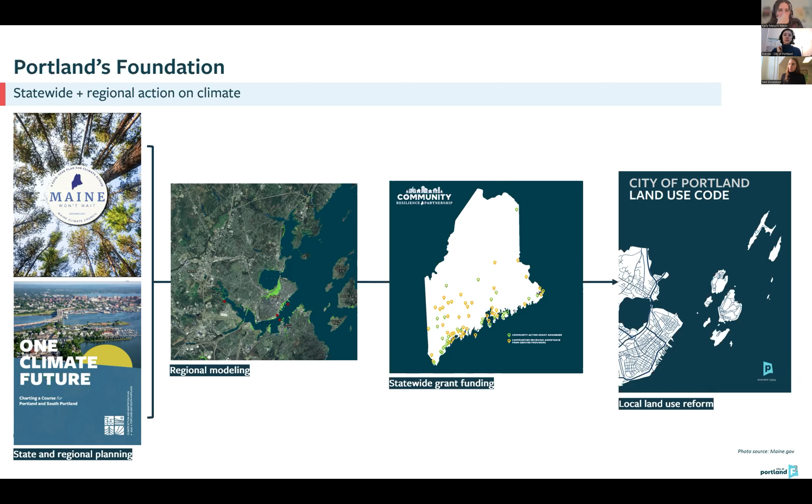So coming out of One Climate Future at the City of Portland, we collaborated with the City of South Portland again and the Army Corps of Engineers to develop, first and foremost, a regional hydrodynamic model that could more accurately help us understand the future risks associated with sea level rise and storm related flooding. And then we applied for a statewide community action grant to actually fund the climate resilience zoning work. We got that funding and embedded this work within our local land use reform effort.

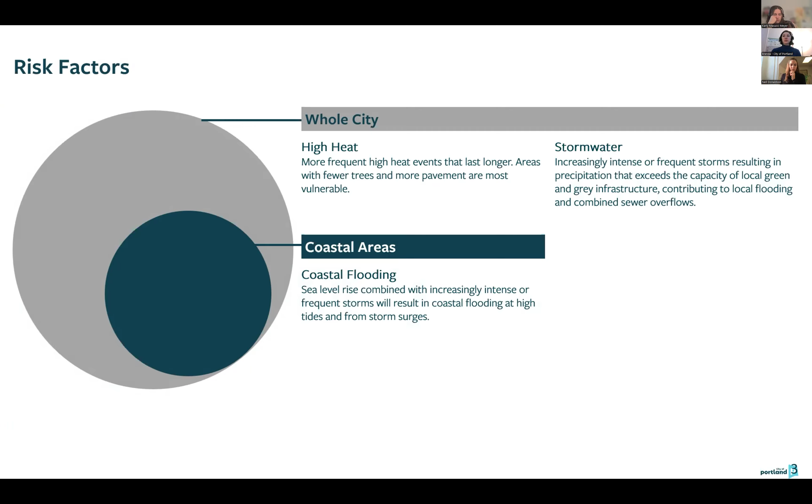So there's sort of three things we were trying to tackle with our climate resilience zoning effort. At the whole city level, we were trying to tackle risks associated with high heat. We know we have more intense heat, more high heat days, and stormwater, again, more intense precipitation, more frequent storms. And then in a more sort of confined geographic area, we know, everybody knows, we are facing risks associated with flooding, in association with sea level rise and storm surge. I'm going to talk about all three of these risk factors in the work we did in our zoning. I'm going to spend the most time on the coastal flooding response, just because that's one that people are broadly interested in, and I think it dovetails with work that South Portland is doing.

The basic principle of our response to the coastal flooding risk is not new. It's about elevating uses to get them out of harm's way. This is a pretty basic concept. There's lots of communities around the country that are doing work and responding to flood risk in this way.

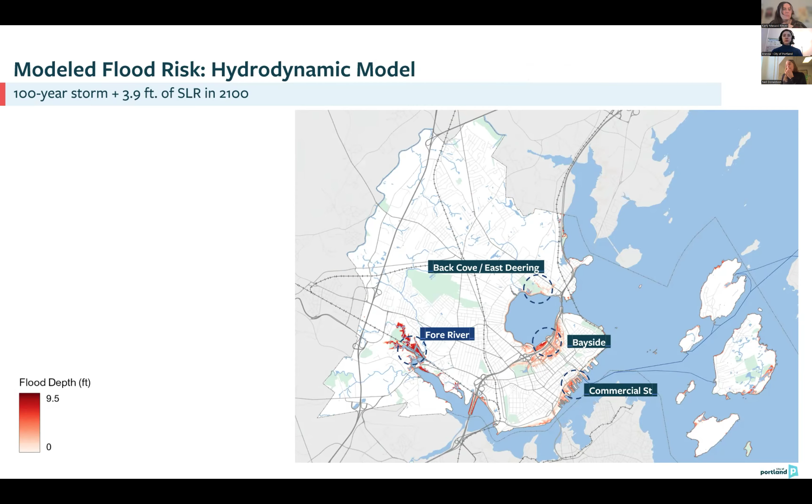This is a map that shows the work we did with the Army Corps of Engineers to really understand sea level rise and associated flooding. So this map shows the results of the hydrodynamic model, which projected a 100-year storm plus 3.9 feet of sea level rise in the year 2100. I'll show you a comparison. There's a couple of areas where the FEMA floodplain versus the hydrodynamic model, you see a really broad difference, particularly in Bayside and downtown and the waterfront.

So though those FEMA regs have done a lot of things well, the hydrodynamic model shows a different set of risks in a different area and at a different level. And so we built our coastal flood resilience overlay zone off of this hydrodynamic model.

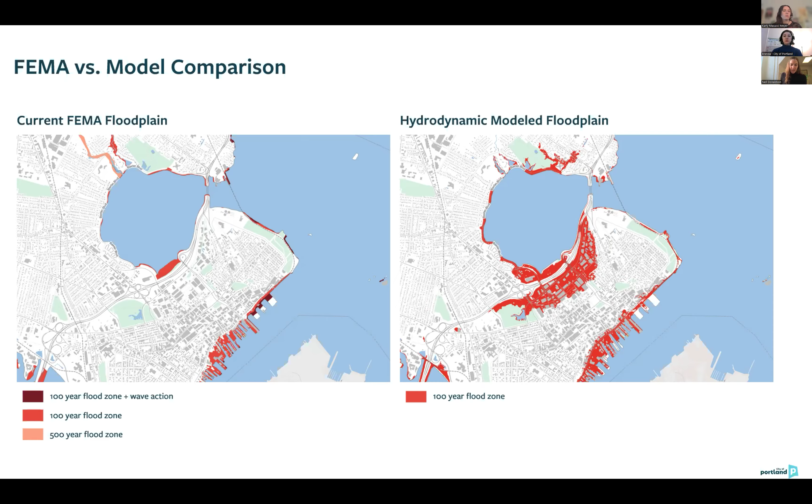And just quickly, brief stop. We're lucky and unlucky in lots of ways in doing this work, but recent experience really shows that the hydrodynamic model is accurate, right? We have recent experience in the city of Portland and South Portland too, of flooding that really maps with what the hydrodynamic model was showing.

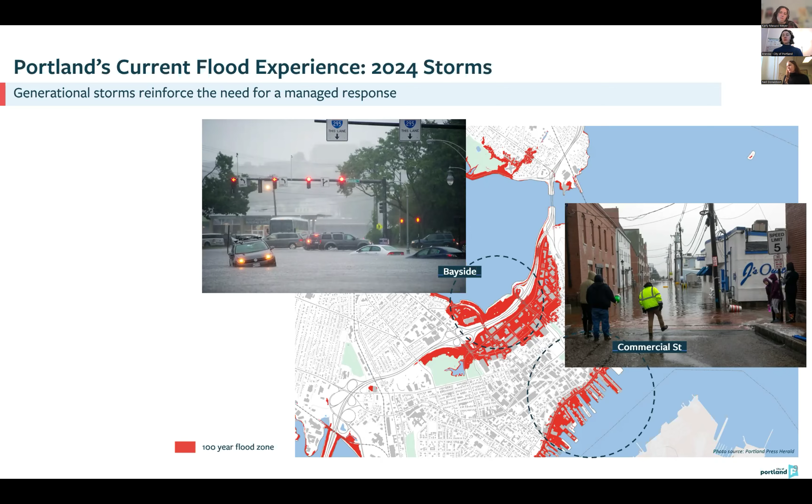And I think this was something that worked in our favor in developing this zoning, right? People understand there's a risk here and that we need a coordinated response. And so in getting this zoning underway, we didn't have to work terribly hard to help people understand why this was necessary.

Just a quick stop too on these two areas that are showing the most vulnerability in our hydrodynamic model. Bayside and the waterfront are different areas with different opportunities and different futures and different barriers and constraints. And so when we were thinking about developing our response to the sea level rise risk, we were really trying to craft a regulatory tool that could be flexible enough to handle these different areas, right?

Bayside, you've got fill from that mid-19th century fire. You have an industrial legacy of large blocks, urban renewal legacy of large blocks close to downtown. The base zoning there has been very flexible and promoting lots of development. It's close to downtown. It's an area with lots of opportunity.

The waterfront presents a different environment, right? We have waterfront uses that are prepared to get wet in lots of ways. We have on the upland side a historic context that isn't seeing much development or change in terms of building. And there we recognize we need a more adaptive strategy, right?

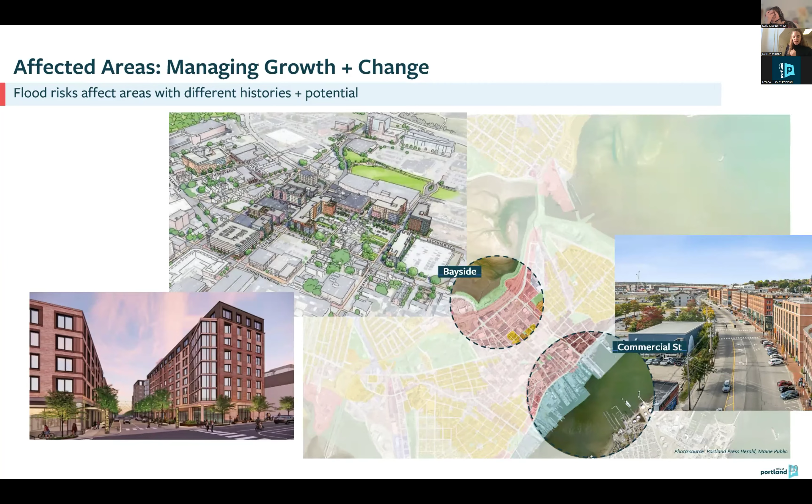And so we were trying to write the code for various types of places and provide flexibility, with the basic premise that we're not ready to retreat from these areas. We need to manage risk in the place we're at right now, and still let things happen in a smart way. So the approach is what we're calling our coastal flood resilience overlay zone.

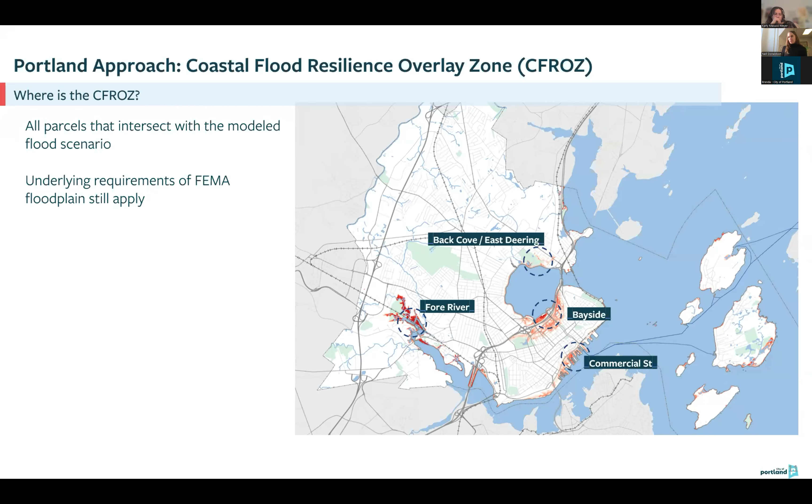It basically follows the areas that intersect with that hydrodynamic model. So this is that model again. Any area that shows flooding in that hydrodynamic model under that sea level rise scenario, 3.9 feet, is in the coastal flood resilience overlay zone. It's important to note the requirements of FEMA still apply. And we developed this zone, again, with this idea of flexibility, using a tiered approach.

So there's a couple of concepts that are central to the way we wrote the zoning. First and foremost is that we want to be stringent where it matters the most, where we're most concerned about vulnerable uses and vulnerable buildings. We want to plan for future adaptation in other contexts, and then certain things are okay to get wet, and we can let things get wet as long as we are smart about it.

And so we wrote the zoning with tiered use paradigms. So certain uses are exempt: marine uses, parking uses, storage uses, these uses that can get wet, can withstand periodic episodic flooding. We set a second bar of uses that we called non-critical uses.

These are uses where people are not generally most vulnerable when they're in these places, right? People can choose when they're at a restaurant or they're going shopping. So these are uses that people can sort of plan whether to be in at times when there might be flooding. And then critical uses, places where people are sleeping, basic functions of government. These are places that are super vulnerable in the context of sea level rise and storm surge.

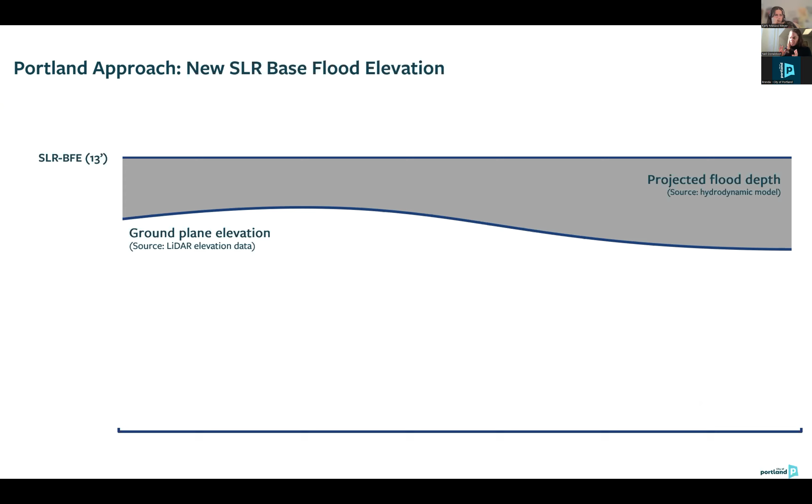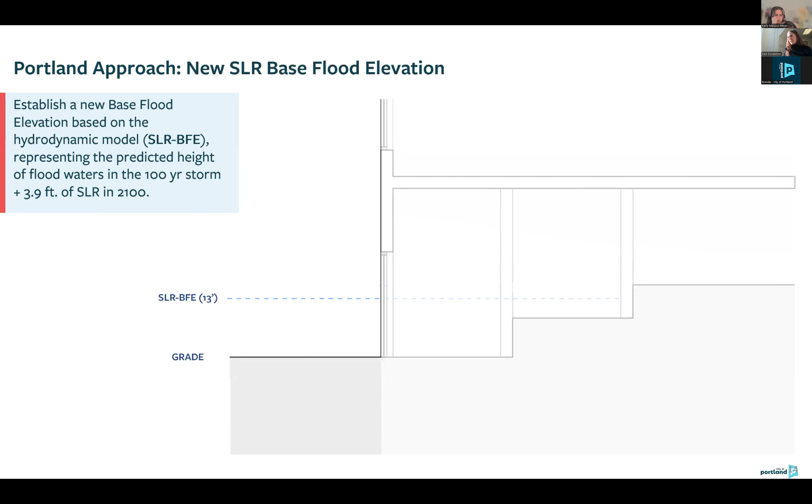So the zoning is really pretty simple. The idea is there's a sea level rise base flood elevation based on that hydrodynamic model. We set one sea level rise base flood elevation throughout the entire zone. Lots of communities take different approaches to this, but we wanted these regulations to be simple and understandable and easy for folks to deal with at the site level. So that sea level rise base flood elevation is 13 feet across the entire Coastal Flood Resilience Overlay Zone in the city of Portland. And basically the way the zoning works, exempt uses are allowed anywhere in the zone relative to that sea level rise base flood elevation.

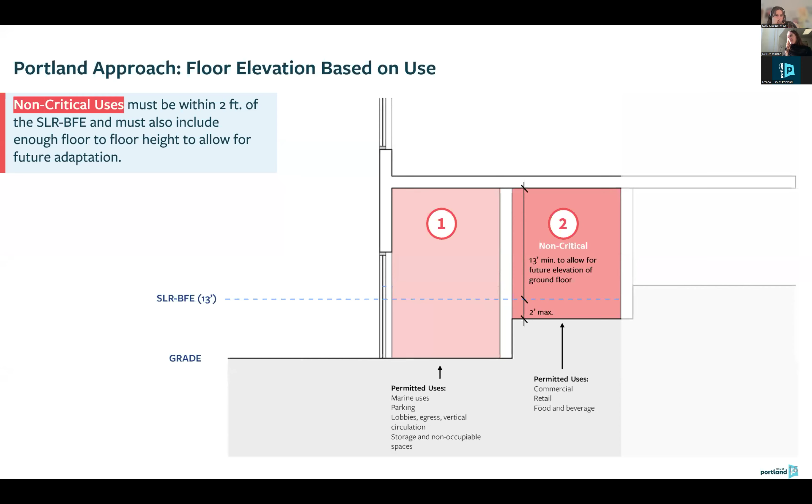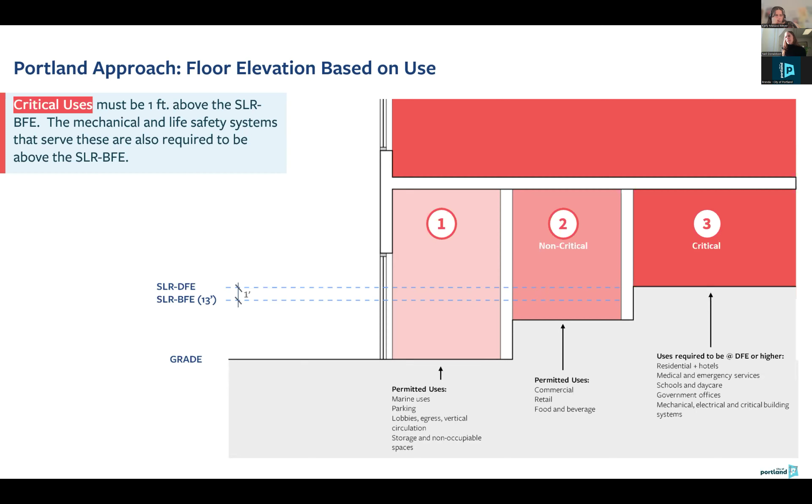Non-critical uses, again, restaurants, retail, need to be within 2 feet of that sea level rise base flood elevation. So it can actually be 2 feet below that sea level rise base flood elevation. And that's, again, because these are uses that people can choose to be within or without. There's other flood proofing that can help with these types of spaces. And then critical uses are required to be 1 foot above that 13-foot sea level rise base flood elevation. Again, places where people are sleeping, schools, these critical functions and most vulnerable places need to be elevated. That's it. That's the basic approach.

And it is worth noting we did a couple of other things in our zoning to accommodate the fact that regulations like these start to bump up against other goals that we have at the city, right? So we want first floors, particularly in mixed use areas of the city like parts of Bayside or downtown or the waterfront, to be active. We want people to be able to see in the first floor windows. We want people to be able to access the first floors of these buildings in a wheelchair. And so we did a couple things, particularly in our dimensional standards, to compensate for what we're requiring in terms of ground floor elevation.

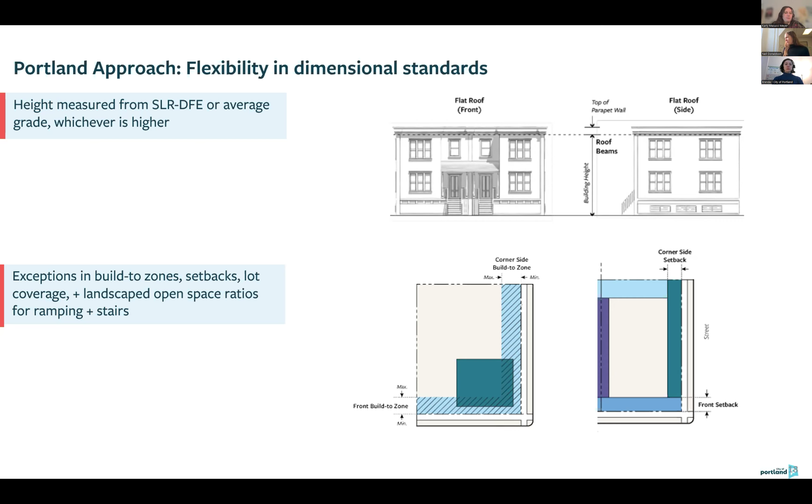One, we allowed additional height. So in the Coastal Flood Resilience Overlay Zone, you're allowed to measure height from the design flood elevation. So that gives people a little bit more headroom, so to speak, to go up, to compensate for the fact that we're requiring them to build that first floor up. And then we provided some exceptions around setbacks and build-to zones so that people could fit things like ramps and stairs, so they could deal with that interface with the street in ways that are creative, and again allow us to meet other goals that we have in terms of the public realm and ADA accessibility, et cetera.

Just very quickly, this zoning is not very old, it's a year old. So we haven't seen a lot of development within the Coastal Flood Resilience Overlay Zone yet. But we do have a couple of projects in the pipeline. One is on this site in Bayside. I'm showing on this slide the design flood elevation for critical uses. So here's a site, and we're saying through these zoning regulations, if you're going to put housing here, you need that first floor to be 5.5 feet above grade, which is high, right? That's my height. That's where the floor is on a housing development on this site.

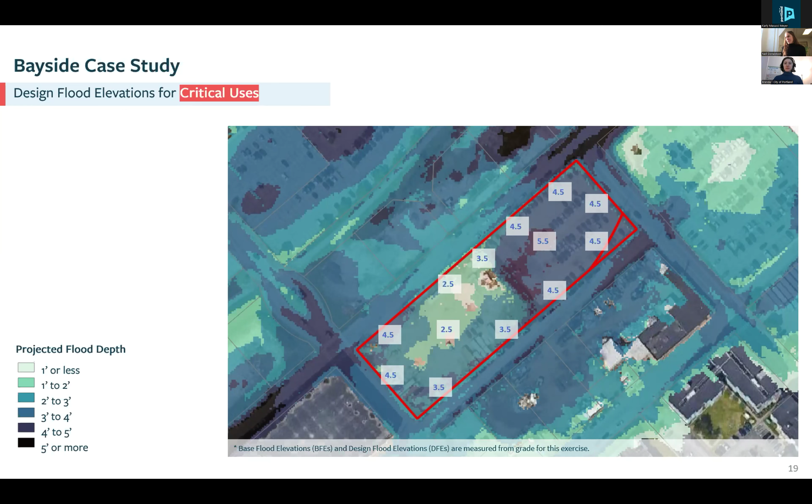We spent a while developing graphics to help the general public understand how people might manage this requirement inside and outside buildings. Again, this is where these requirements are interfacing with other goals that we have at the city around the public realm.

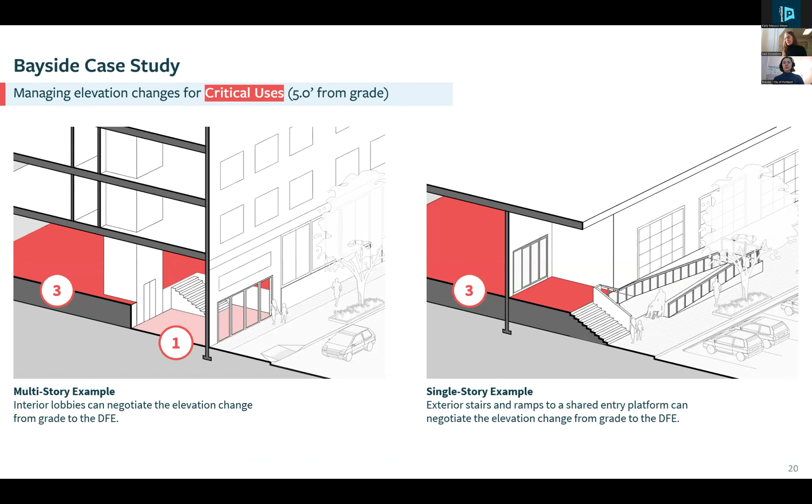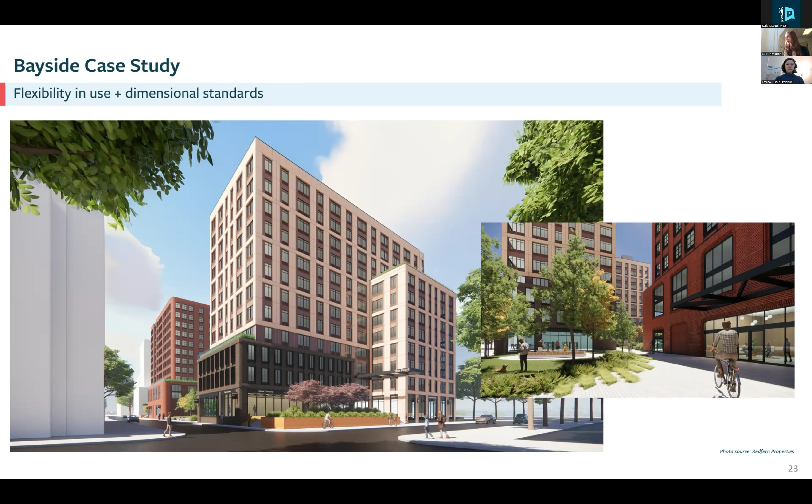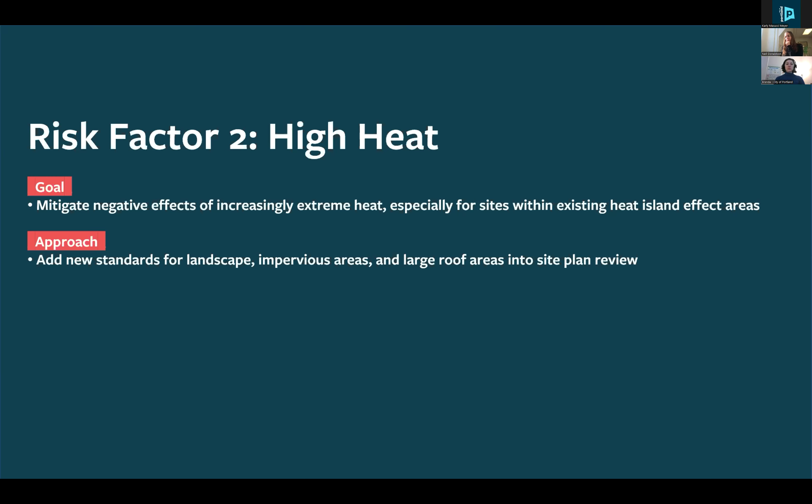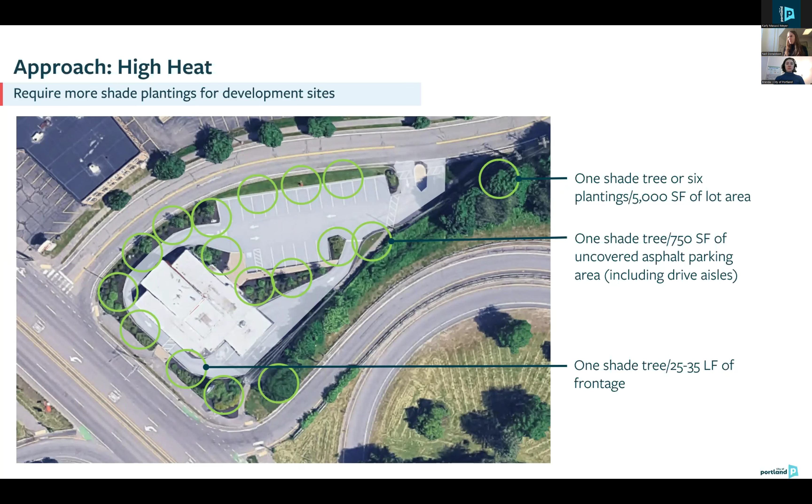So we essentially enhanced our canopy requirements for all development sites: parking lot and paved area canopy requirements across all types of sites, even without parking areas. And our street tree standards we modified as well to more accurately get at the heat island issue in terms of shade trees. We also established some cool roof and cool paving requirements. Certain projects in the city are now required to meet solar reflectance index standards for roofs, and non-vehicular paved areas on development projects need to meet solar reflectance index standards.

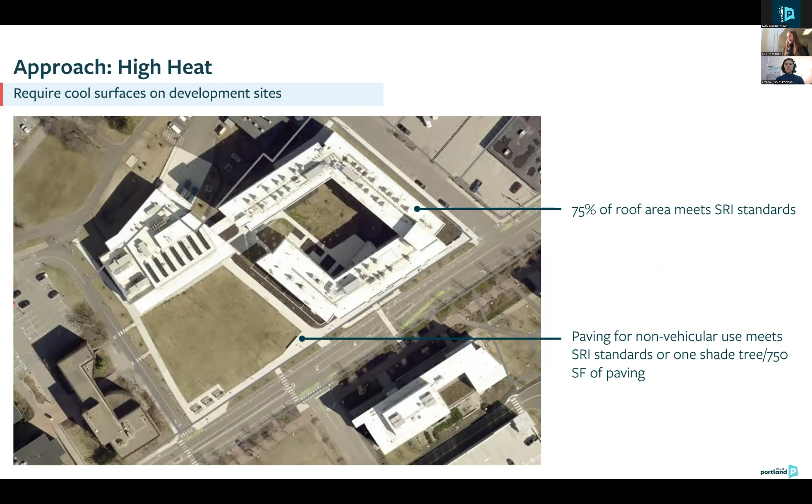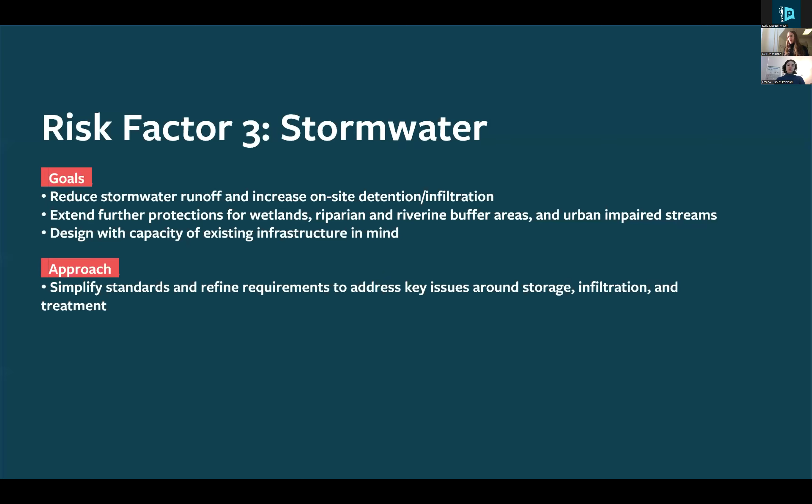And just very quickly, the last risk factor we tried to address in our climate resilience zoning was stormwater. Again, this is a huge issue. We did some work with our Department of Public Works to standardize and simplify our stormwater requirements in the city of Portland, to address redevelopment sites more actively. A lot of the projects we see in Portland are not greenfield projects. They are redevelopment sites. So how can we make sure those sites are doing what they can to absorb, treat and slow down stormwater runoff before it enters the public system? So we also added detention and infiltration standards on all projects across the city that are entering the system, standardizing what had been an ad hoc process before, with standards about slowing the rate of runoff.

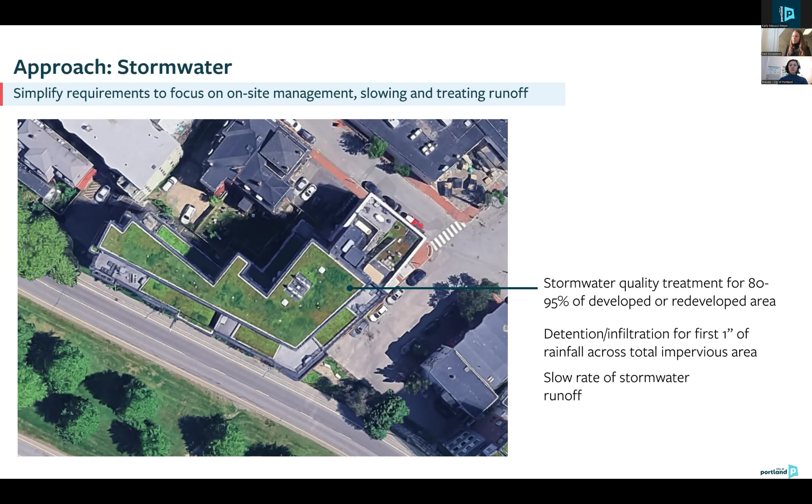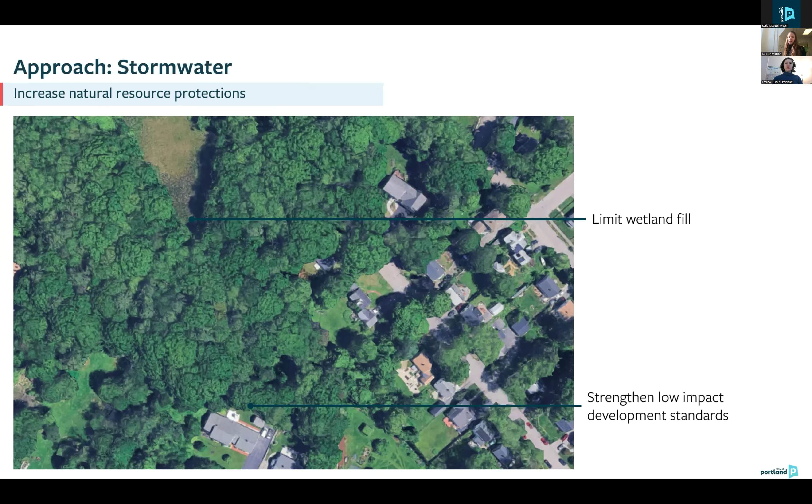And we also did some work to address those greenfield sites where they exist. We do see some greenfield development, so we tried to strengthen our standards around wetland fill and around low impact development more generally. This is my last slide, but it's interesting to end on it. This is a place where we are seeing big goals at the state and local level around housing development bump up against some of our other goals around managing stormwater and protecting wetlands and all of these really important things. So we're in the process right now, one year after Recode, of refining our low impact development approach to try to balance these things a little more effectively.

So that's an interesting place to land. The takeaway there is we feel good about the climate resilience zoning package that we got through at the end of last year, the Coastal Flood Resilience Overlay Zone, and these other things I've just mentioned. But this is all a work in progress. And so I think there's an evolution in these types of regulations that we'll continue to see in the city of Portland, and we are always watching to see how these regulations work as they bump up against other goals, trying to calibrate everything so we can have a more resilient future, but continue to allow housing to be built and all these other things that we want to see built in the city of Portland as well.

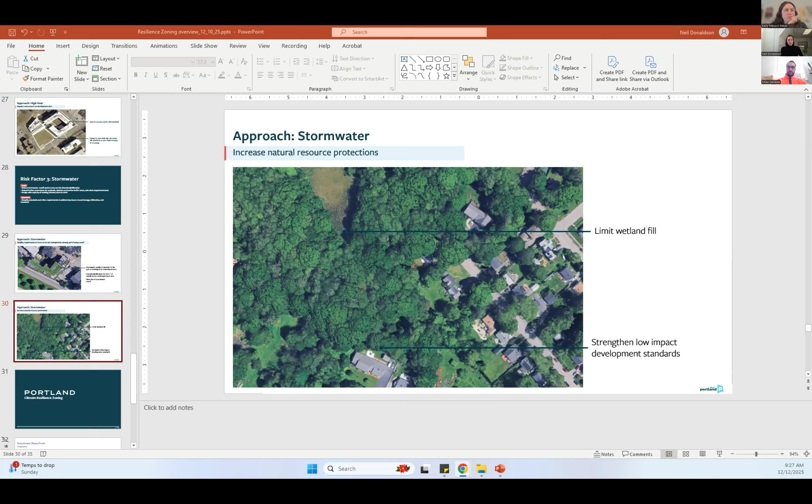I don't have a lot to go over, and I'll try to keep it brief so we can focus on questions. But I want to highlight our experiences in South Portland, what we understand the model is showing us, that Nell walked you all through. There are limitations to our model, even though we've spent the time with the Silver Jackets team adding additional data to the inundation map so we can understand the future projections. But there are still limitations to that. At the end of this presentation, I'm going to highlight what we have identified as next steps to get better at closing some of those data gaps.

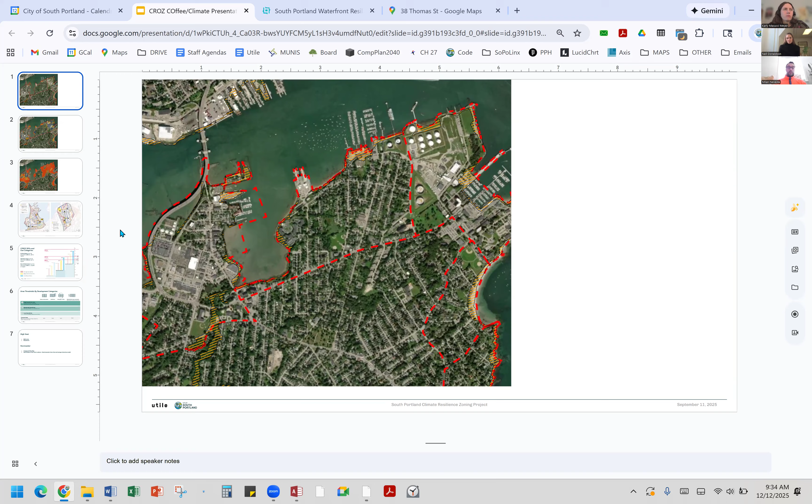Because we're in the plan or the ordinance writing phase, we're not kind of having it written and looking back on how it's working. I do want to just highlight our process a little bit. So we were understanding the maps and understanding our conditions and what are our sort of areas where we need to spend more time with the consultant, that we can't just sort of rinse and repeat what Portland might have done, or what Portsmouth or any other town might have done.

We felt it was important to pull together a group of residents that had been engaged with us for many, many weeks, months, years, even on this topic, and bring them into the fold and work through some of the data and some of the maps and some of the conditions that we were seeing, so that they can help us understand how they understand the situation and what questions arise for them, and, since some of them are property owners in affected areas, what are they calculating on their side of things?

What are they getting anxious about, and so on. So we formed this group of, I think it was like 15 to 25 people, I can't remember the exact number, that went through a series of organized training sessions on just the materials and the data. How do you understand elevations? How do you understand sea level rise dynamics? Get them sort of coached up on that stuff, so we all have similar vocabulary and can at least express our thoughts in a way that other people will understand in the group.

And then we did a series of workshops where we went through the most critically affected community areas. And I'm sort of highlighting on these maps the downtown and Ferry Village area, just because I think they raise the most interesting policy questions across the most broad set of policy issues. But there's certainly other areas affected. I'm not diminishing the importance and significance of the impact in Willard, for instance, on our eastern shore. So don't take away that these are the only two areas we care about. It's just where we had the most concentration of different issues to focus on.

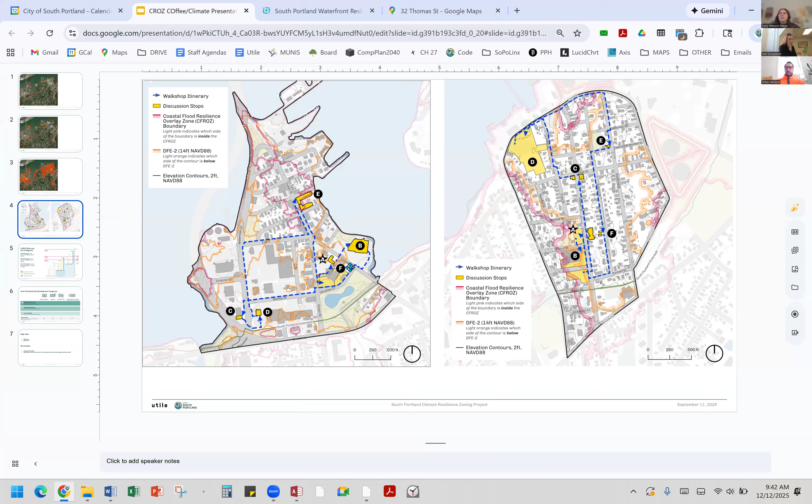So those are just a few examples of how we're sort of testing and exploring how we prepare for these flooding conditions across different scenarios, and what are the implications for the development. And as Nell said, we have to strike a balance between what is reasonable to protect against the risk and the widespread community harm from the flooding that we project, and what is still going to maintain livability and the viability of our community. We can't just shut down anything that's realistic. So we have to strike that balance.

We might not get a storm that year, and it might not be an issue because those are 1% chance storms, for instance. But we will certainly see tidal activity in the year. We'll definitely see it twice a day, and at least twice a year, we'll see a higher than average tide or the highest astronomical tide. So those are known fixed conditions just because of where the moon is and where the planet is. And so we're planning for that as sort of a baseline: anything sensitive to water needs to be thinking about that daily interaction with water through tidal conditions and sea level rise at 3.9 feet. There are some uses that are slightly more sensitive, and that the storms can do lasting damage.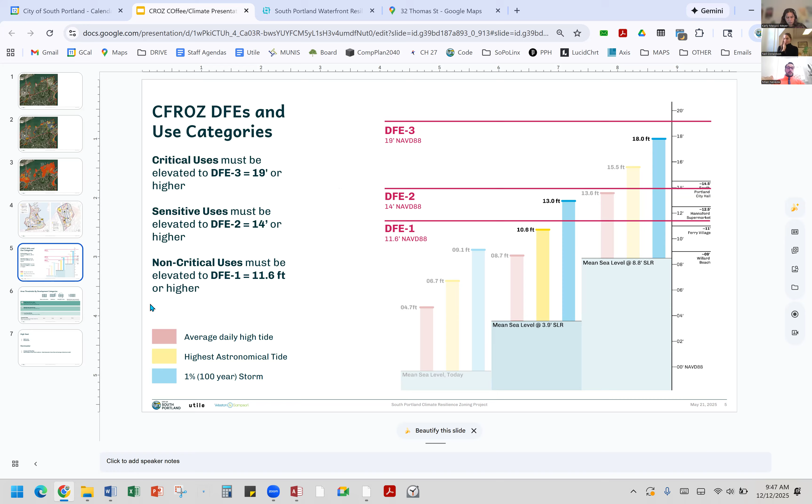We have a similar schematic at the end of all of this. Even though we have these three different layers of flooding that we're projecting for and different ways of approaching the uses, we still boil down to the similar framework that Nell talked about, where we need to talk about what new construction needs to comply with, what additions to existing structures need to comply with, what happens if you have an existing structure and you're just changing out uses internally, and then what happens if you're doing a major renovation and you're opening up the whole building.

This has been a long-standing thing in the development world. Talk to any electrical inspector, they'll tell you that if you've got a 100-year-old building, we can guarantee you that we don't like the electrical in there. It's not compliant with code. But we're not going to require someone to fix their entire electrical system if they're just repainting their house. So we need to think about when it is reasonable to require a system upgrade for your entire electrical system in a house or in a building.

And we say, okay, if you're opening up all the walls and you're gutting the building and everything's accessible, including the electrical panel, that's the point where it's only marginal additional cost to get you into compliance with current electrical code. So we look for these things that we label substantial improvements, to say, all right, the building might as well just be brought fully up to code. And we have the same question for the flooding situation.

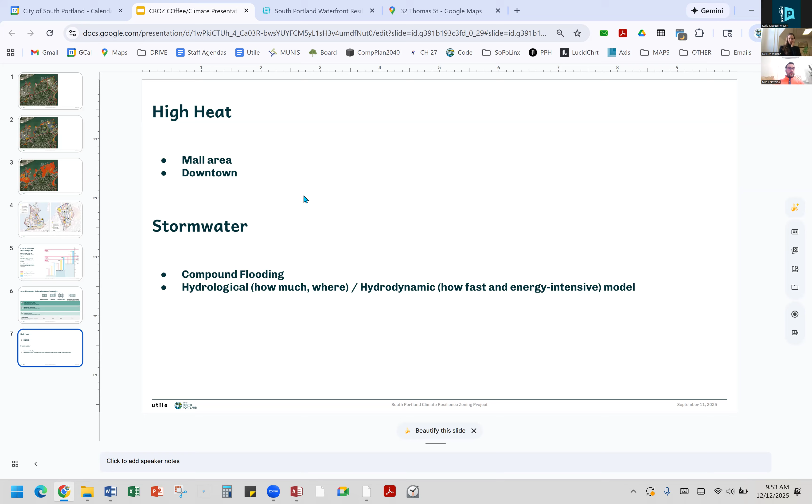So as the seas rise and as rain gets more intense, it's going to put more strain on our stormwater conveyance piping and pumping systems through the community. So we need to understand where that stress is, where it's most acute, where it's most imminent, and then look at standards that could help alleviate that by using land development to slow down that water, absorb more water and pace it out so that our system can handle it, and also look at upgrading our system where it's most effective to do that. So those are what we're looking at.

So those are all the critical conditions that we're talking about now. So I'll stop there, and hopefully didn't go too long, but happy to answer any questions as we're continuing to build out the ordinance. I will also plug February 10th is our workshop with the city council to present them with where we're at and what are our critical questions, which paths do they want to take on the policy that we're drafting.

So if you're interested in this topic in any community, you can patch in and either listen in online to the council discussion, or come in and participate in the debate and weigh in to council on what you think about the whole proposal.